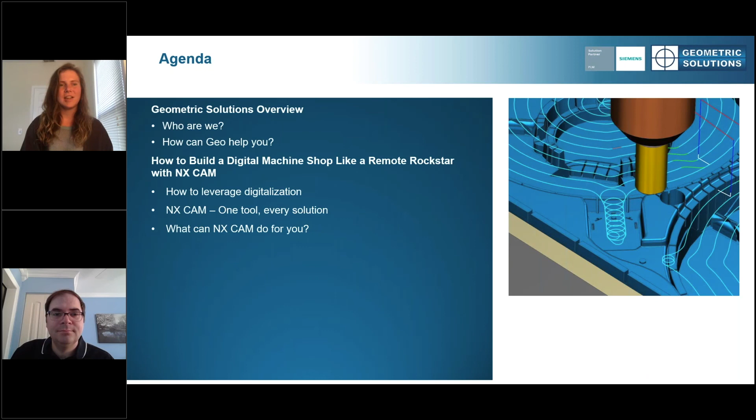Just a quick overview of our agenda. We're going to begin with a little bit about Geometric Solutions, who we are, and how we can help you. Then we'll jump into our main topic, digital machine shops, specifically leveraging digitalization, NX Cam specifics, and the potential of NX Cam as a solution.

Before we get started though, we're going to have a tale of 2 companies, Company A and Company C, or C minus. It's oftentimes that you'll have 2 companies, maybe even across the road from each other, in the same city, the same town, they have the same labor pool, they are even competing for the same business. But you could say that's where the similarities end.

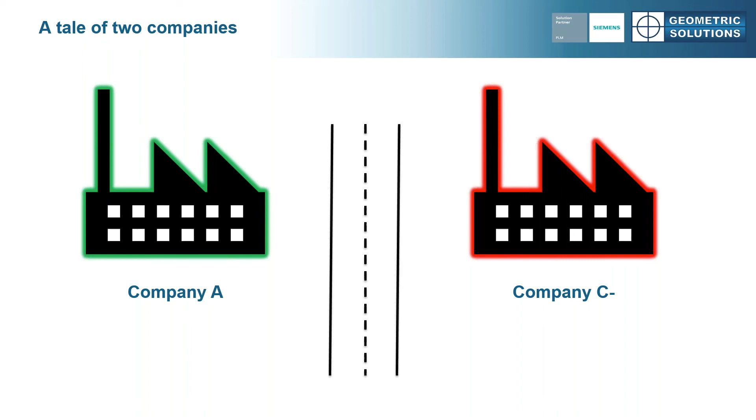With Company A, what do they do? They invest in technology. They invest in new equipment. They invest in their workforce, and they are thriving. Whenever I go and visit a company like Company A, everyone there is busy, but they're busy because there's so much work that's coming in.

We also sometimes will visit Company C, or C minus. When we go there, it's outdated technology, old equipment. They have a high attrition rate. Everyone working at Company C wishes they were working at Company A, and they are merely surviving. One of the companies we visited really falls into this category. They were off maintenance on all their software, so they couldn't get the support that they needed. Even for a machine shop, it was especially dirty. And it was interesting that when I went into the room to sit, even the chair that they gave me was missing an armrest. It just shows that company, they're just trying to survive.

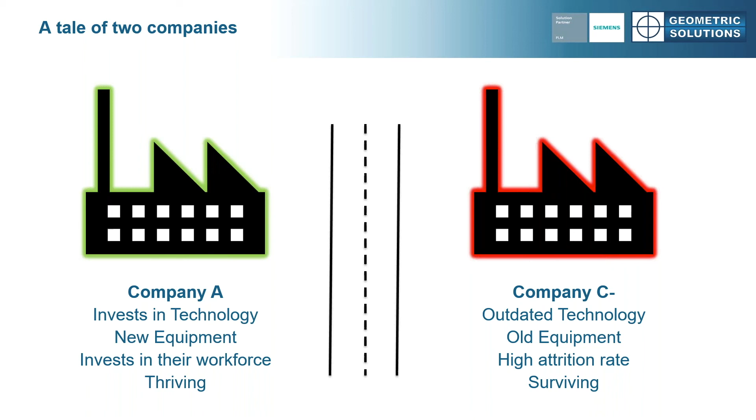When's the last time that you bought a book with paper? We probably used an ebook. Or when's the last time you bought a record or a CD? No, we don't do that anymore. We stream. We can see that digitalization in our day-to-day lives changes things. For me personally, I take Uber frequently, but I can't tell you the last time I was in a taxi.

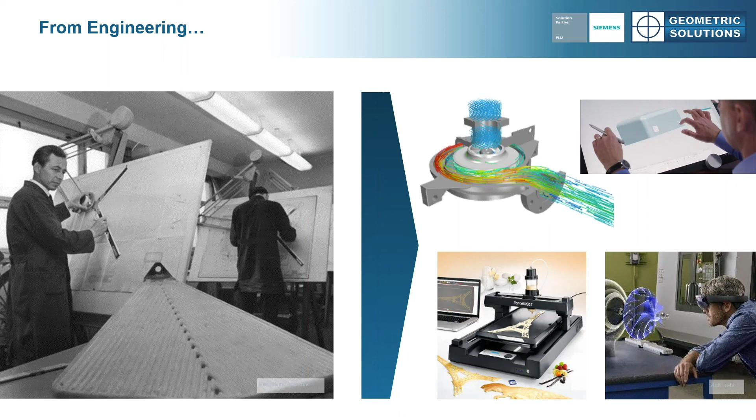Things are changing and they're disrupting markets. We're finding the same thing in engineering and manufacturing. With engineering, we're going from having paper and pencil and T-squares to being able to have virtual reality, 3D printing, able to really visualize what we're doing, or verification and testing.

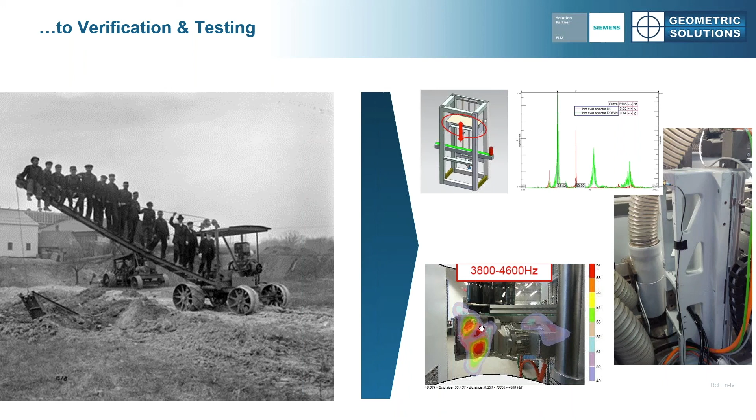It's kind of a cool picture on the left. We could say this crane, how strong is it? Well, it's 15 men strong. But that's how they used to do things. With digitalization, we're able to test things in advance without any risk of anyone being injured.

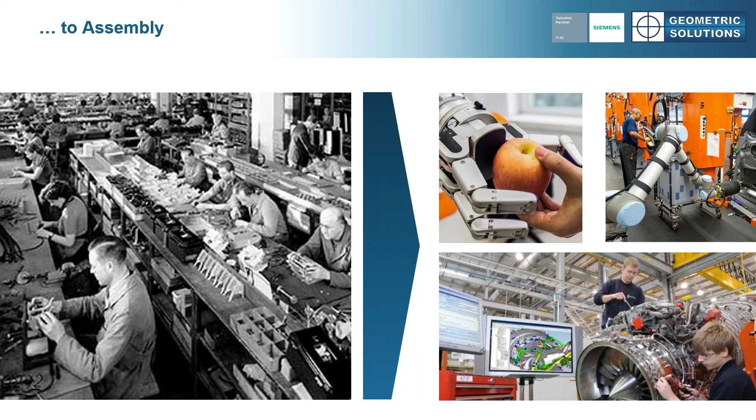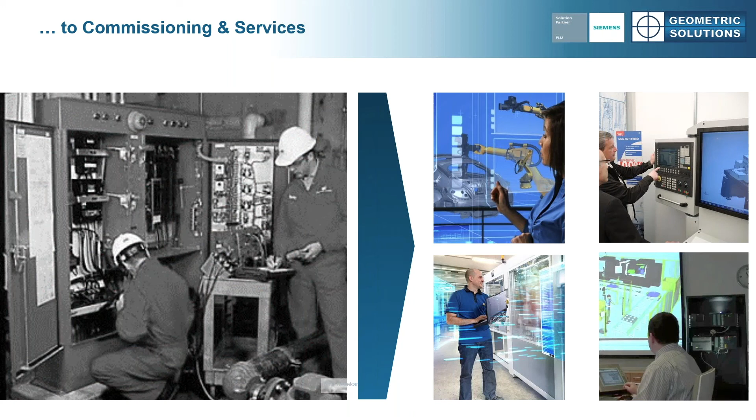With digitalization, though, what are we doing? We're using our workers more efficiently. We're using robots, cobots, and the like. Even when it comes to our commissioning, now it's much faster than it has been in times past. Why? Digitalization. And what we're talking about today, manufacturing production.

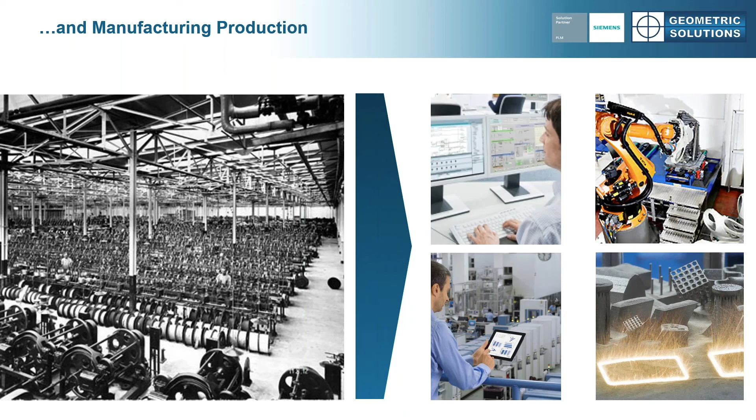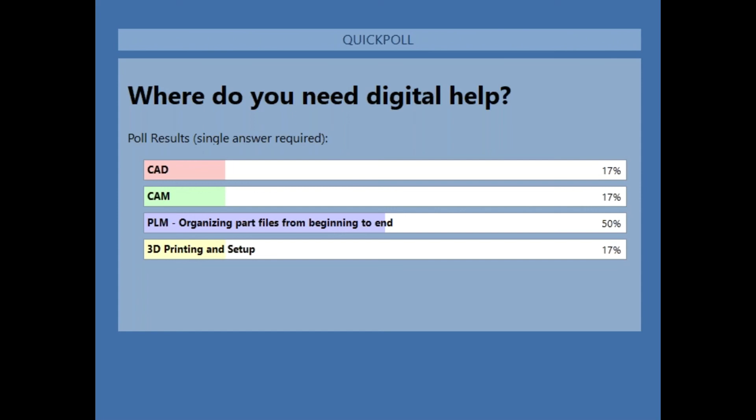Where do you need digital help? Looks like our top answer is PLM. That's interesting. Yeah, that is a big problem, that you can have a part, but which part is the most accurate? We're actually going to focus on that a little bit in this webinar.

When it comes to the issues our customers are facing, you can see them on the screen here. And not to be so cliche, but really that's what it is. We need to reduce the time to market. Consumers, their desires and demands, they change. You almost could say week by week or day by day. Traditionally, the big competitor has beaten the small one, but now it's the fast one that's beating the slow one. Or enhancing our flexibility.

Consumers now, they want to have products that are individualized to themselves. So I want to get a pair of sneakers that I designed, but I don't want to pay much more than the mass-produced ones. See, this is requiring more flexibility.

Now, we could be fast and flexible, but if we have no quality, that's no good. That's another thing that's changed. Today, if we make products that have poor quality, we'll be punished by consumers on the internet. On the flip side, if we make products of great quality, we'll be praised. And lastly, efficiency. It's interesting that in the modern world we're living in, it's not just enough to make our parts efficiently. We also need to make them environmentally friendly, or even think, how are we consuming energy? See, this becomes an advantage for us today.

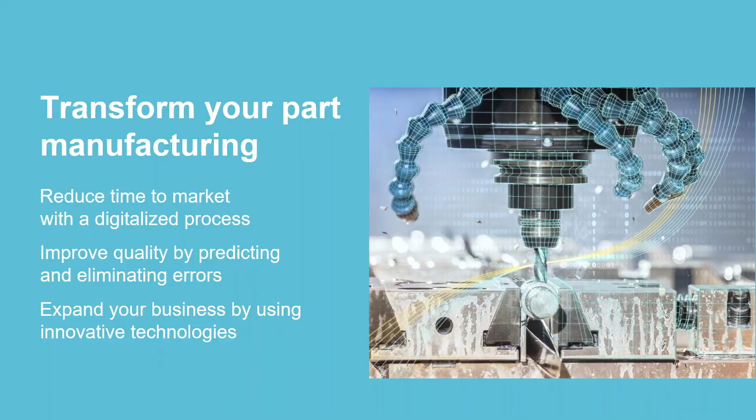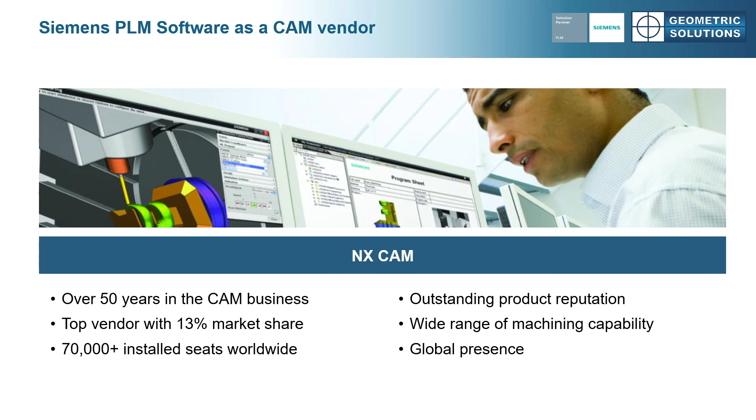NX CAM is a Siemens product, and it is very well established in the industry. You can see some of the numbers that are on here. I think one of the coolest things about NX CAM is that some of the largest companies in the world prefer NX CAM. But then some of the smallest companies that only have 1 or 2 machines, they too prefer NX CAM. And we're going to see more about that in a few moments.

There was even a survey done by CIMdata, and they brought out that NX CAM provides one of the strongest product offerings in the industry. So let's dive into that just a little bit more.

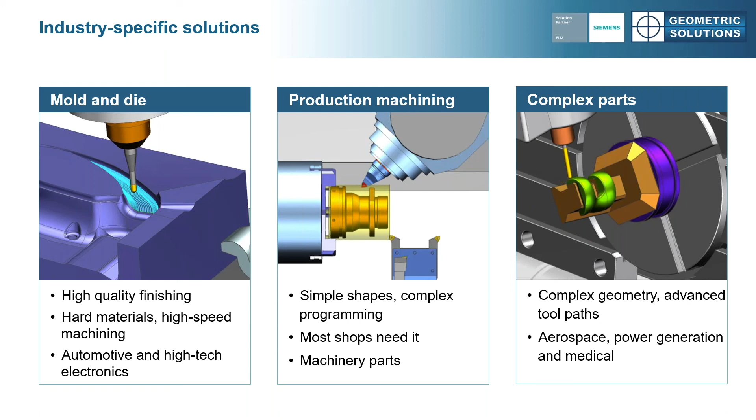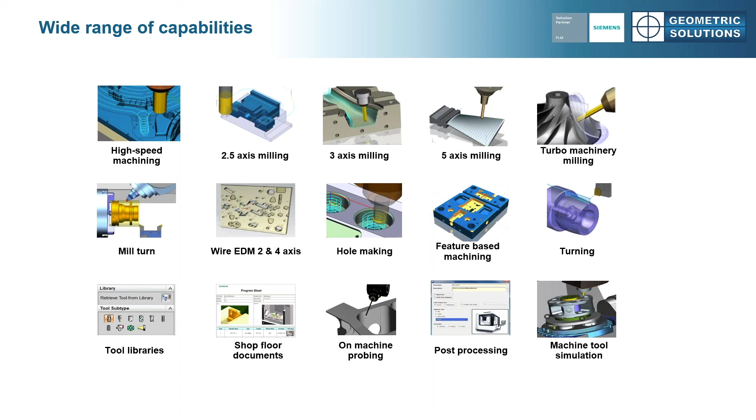NX CAM provides a wide range of functionality, from the simple, from just 2.5-axis milling and high-speed machining, all the way up to 5-axis milling or turbo machinery. The cool thing about NX CAM is that it's one program, one tool that can handle all of this. A lot of our competitors' software will be one specific tool for one specific operation. Not so with NX CAM.

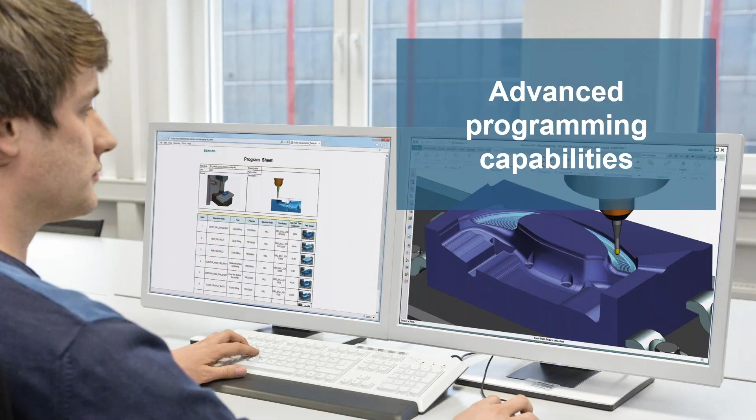To stay competitive, you need a wide range of advanced programming capabilities so that you can efficiently program any application. So with that poll and those questions, we want to be able to do it all. With NX, you don't need a bunch of specialized software systems that just focus on one application. See, that's where the flexibility comes in. NX CAM, you can have the most demanding job and it can be completed easily. You can also drive the latest machine tools to produce parts with high quality.

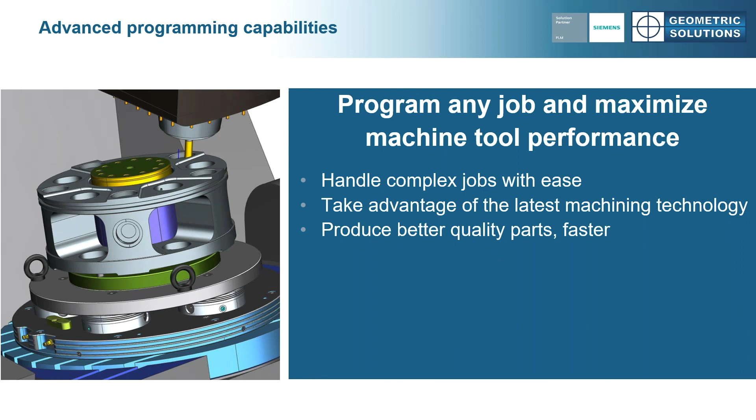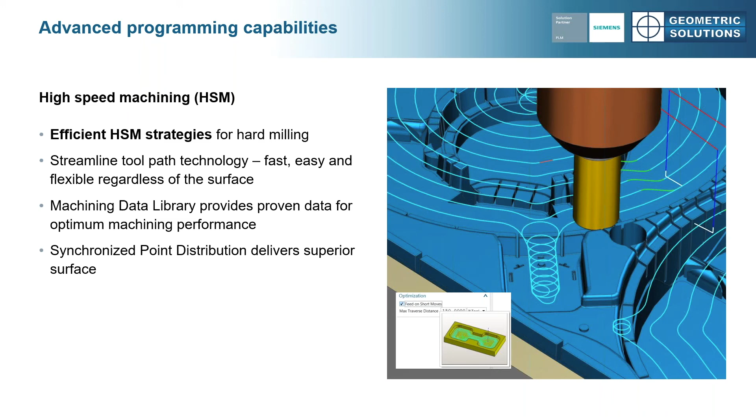So let's dive into that a little bit. Let's look at some of the NC programming capabilities. Now, the first, high-speed machining. This is an important capability in mold and die, prismatic and complex part machining. The high-speed roughing in NX maintains high metal removal rates while managing tool loads. So if you have ever done any machining, this is the part where you could say it is hogging out the material, but it's doing it efficiently, which is really nice.

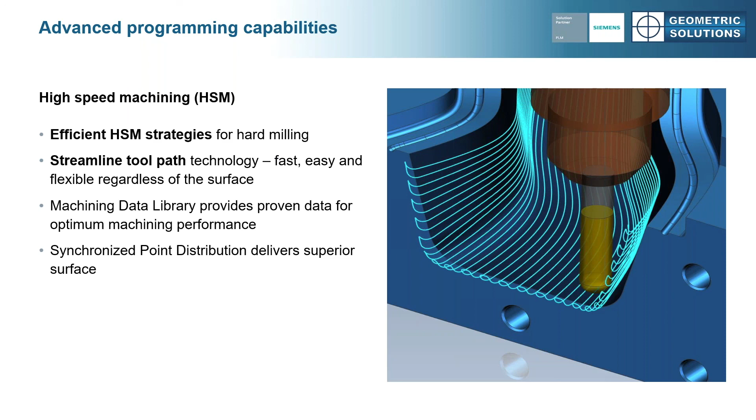The streamline toolpath allows you to create smooth flowing toolpaths that can be set to follow the critical contours or features of a part using just simple guide curves. What's nice about this tool is if you ever get a model and the surface is imperfect, it's got a gouge or a missing part in it, that's no problem, because with the streamline toolpath, you can put a curve right over that. And this will result in a nice, clean, beautiful finish.

NX CAM provides a customizable machining database that enables you to manage and apply proven data to associated toolpath operations. So what we're seeing here with this library, you can automatically apply the feed and the speed for your tool or for the operation. A lot of times machinists will get out the old Machinery's Handbook, or maybe they've got a chart on their wall to make sure they get it right. They don't want to end up on the fail section of YouTube with their CNC operations.

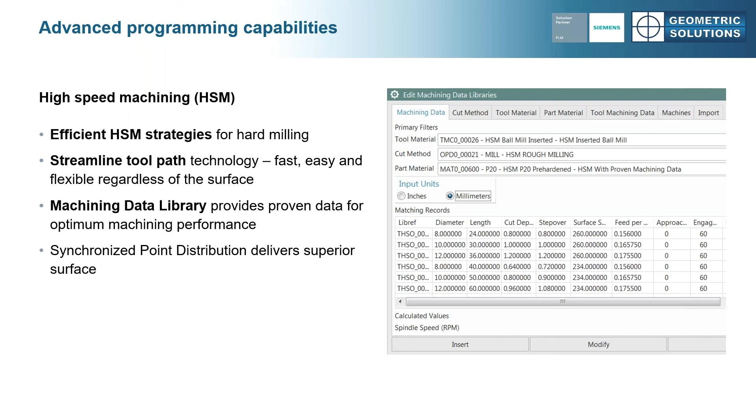NX also achieves a superior finish by ensuring that data points on adjacent passes of the tool are properly aligned with synchronized point distribution. You can see here in the markings overlaid on the example part that it's an exaggerated representation of the data point spacing and the difference it can make to the finish. So you can see on one side, the finish is really nice and shiny, looks good. The other side, not so much.

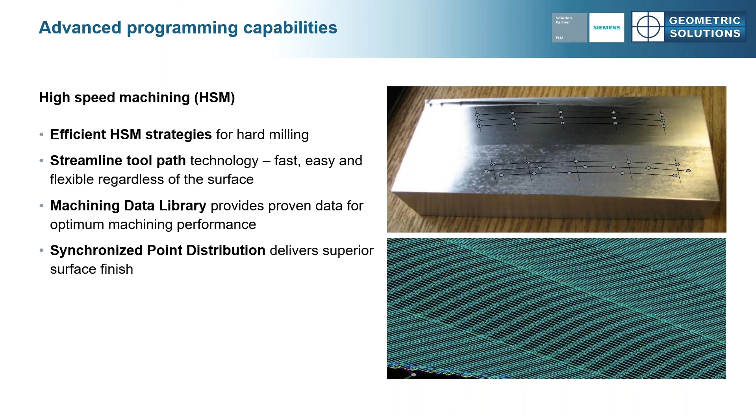Another advanced programming capability is the cut region management. For mold and die machining, this can be used for automotive, high-tech electronics. We have this interactive cut region management tool, and this provides a whole new level of control in planning machining strategies, because here you can preview, change, reorder, accept regions and associated operations before you even generate any toolpaths. The region boundaries can be adjusted, or alternate cut patterns could be selected for any region. And then tool axes can be interactively modified on a per region basis.

If there's a collision that's detected by the system, that's going to save you a lot. This preview and user control means the final machining results are both predictable and optimized. Now, this capability is especially useful for more complex parts where careful planning of the process is required and the user wants to be able to define exactly how a part will be machined. This can make the toolpath generation easier and faster.

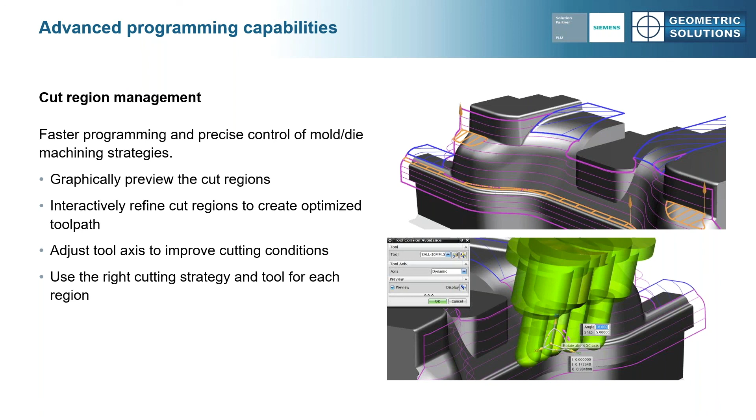The next is volume-based 2.5D milling. This provides a really fast and intuitive method for programming prismatic parts. It's easy—all we have to do is select faces, like the walls and the floors, and that's going to define the machined volumes. In just an instant, you'll be able to visually see what's going to be cut. This makes it 5 to 10 times faster.

Also, with this 2.5D volume-based milling, it's going to reduce the amount of air cutting. That means where the end mill is cutting one spot and then cutting nothing as it moves to another spot. That's going to reduce the machining time by about 10%, because you always want your tools to be cutting.

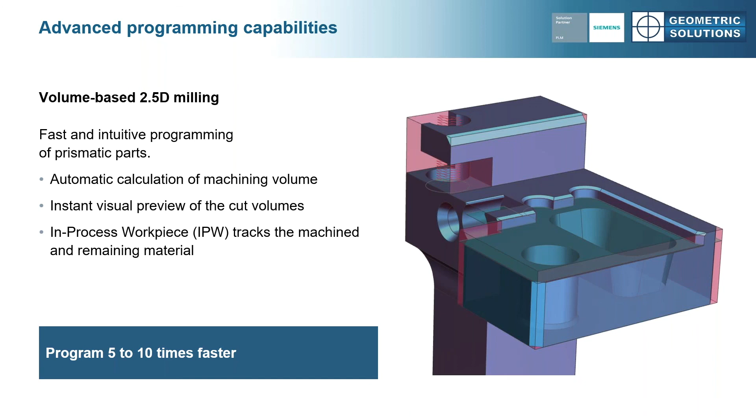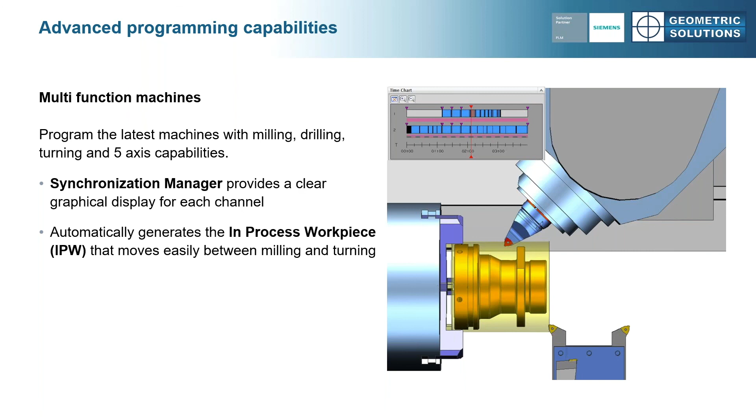NX also offers a range of machining capabilities for the latest multifunction machines, and it also supports simultaneous multi-axis operation. You can kind of see in the image on the top left, we have this synchronization manager. This allows you to interact with the machine, to have control across multiple channels.

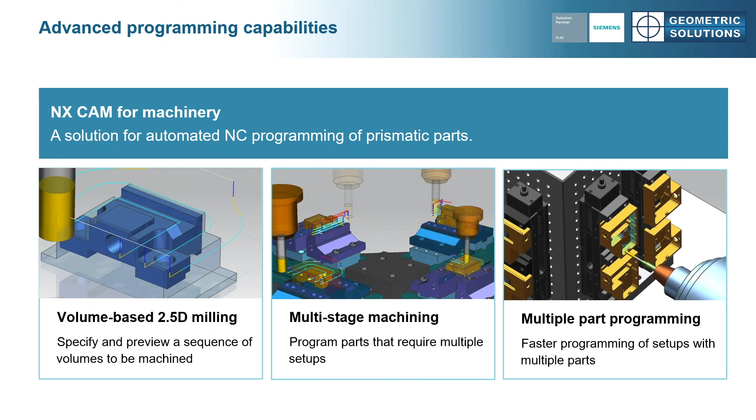Next up is just using NX CAM for machinery. We talked about the volume-based, but you can also see if there's multi-stage machining—so you've got a part that has multiple setups, NX CAM works great for that. Or, on the image furthest to the right, maybe you've got a bunch of different parts that need to be machined. Well, NX is also a champ with that.

As you can imagine, this is going to improve the time it takes to machine, but also the choice of machine that we're going to use. We won't have to wait until there's a collision to realize it's not the right tool.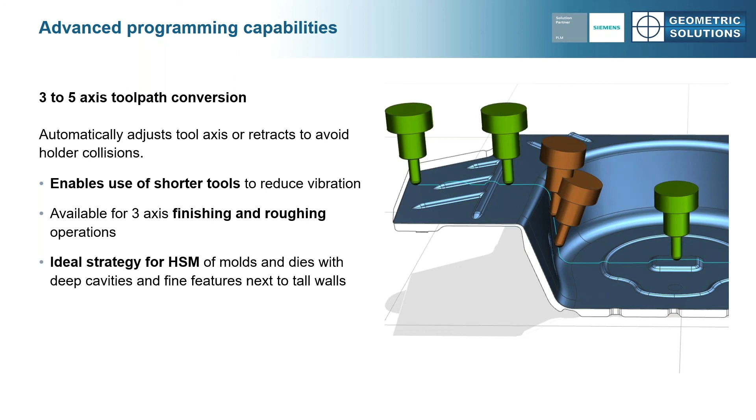NX-CAM has been established in 5-axis capabilities longer than most other systems. For really complex parts—think aerospace, power generation, medical devices—NX has a bunch of highly flexible options.

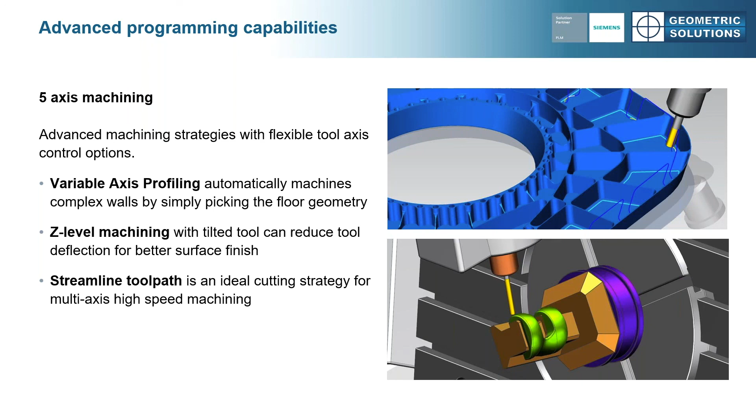One of those options is that if you have a part that has a bunch of different pockets and a bunch of drafted walls—think about the blue part on the top—there's all those pockets, drafted walls. With NX-CAM, all we have to do is select the floor once, and then the system will create the finishing toolpaths for those walls. Pretty cool.

When it comes to turbo machinery, we can think about this as impellers, blisks, really crazy looking multi-bladed rotational parts. Well, NX is a champ at programming these parts. In fact, it's been found that we can save about 50% of our time in programming because we have a turbo machinery milling option.

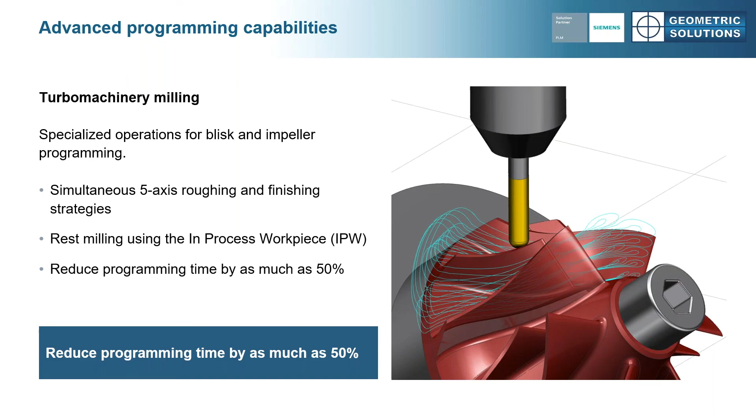Really, you need to improve your productivity and create new opportunities to transform your manufacturing operation with the latest technology. So we might think of this in terms of 3D printing or using robotics. With NX, you don't need to have multiple specialized software systems focusing on a bunch of different applications. Now you might notice I've said that a couple of times, and that's because that's a powerful statement. The flexibility of NX-CAM means that the most demanding jobs can become easy. You can efficiently drive the latest machine tools to produce parts with high quality.

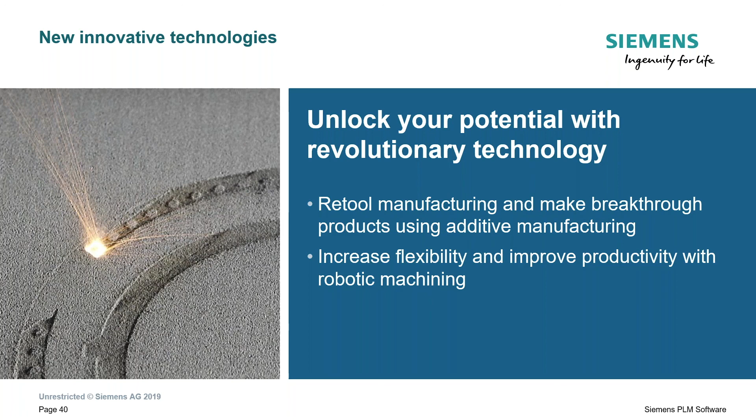So let's explore some of the advanced NC programming capabilities. And we're very excited about what we can do with 3D printing capabilities in NX.

Whoops, I think there's supposed to be some animation playing. Just a sec. Let me go back one.

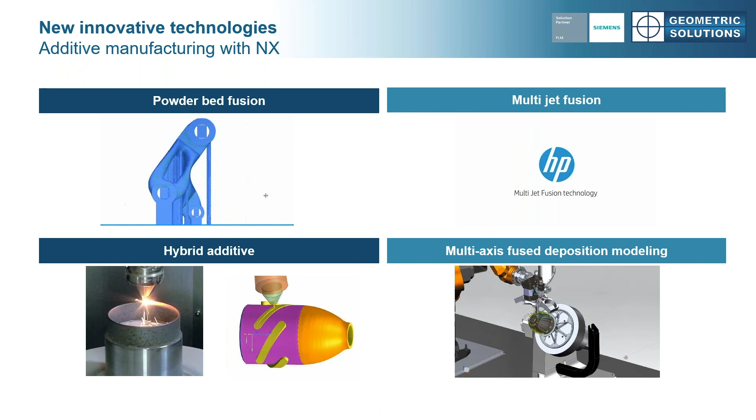Then we have hybrid additive machines, or in the other image, multi-axis fused deposition modeling. What's nice about both of these tools is we're able to create things that before may have seemed impossible. And how are we doing this? Well, we're using NX.

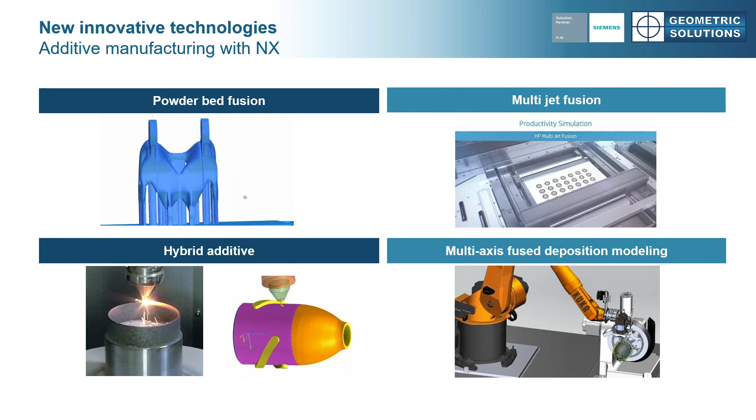Now, outside of 3D printing, there are some other innovations. We might think about robotics. Some of us think of robotics as just lifting, positioning, or welding, and that's it. But robots can do so much more. You can actually take a robot and fit it with a tool holding head, and then perform machining operations.

You can improve your productivity by taking advantage of these continuous technology advances. Robotic machining lets you increase your flexibility to machine larger parts, and the nice thing is in one setup you can improve repeatability and accuracy by relying on the precision of the robotic motions.

Next up, we're going to look at programming automation. So we've talked about how NX can be used on so many different things. Well, let's see with programming how it works.

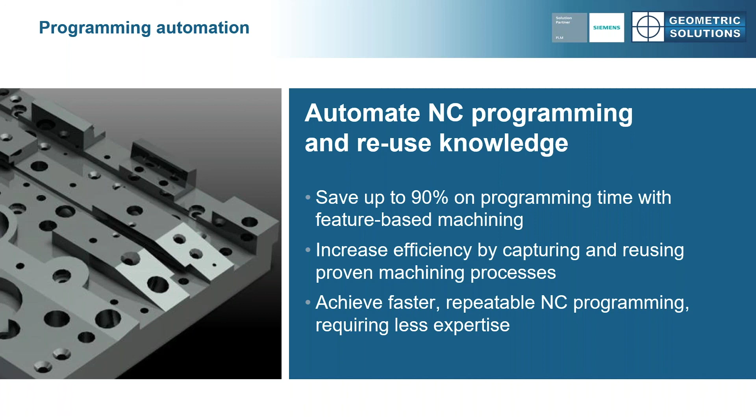With advanced feature-based machining, it provides extra value in programming automation. In addition, capturing and reusing your knowledge is a powerful way to increase efficiency. We're going to look at that. The key takeaway is that we can save up to 90% of programming time by using this feature-based machining. Let's look at that more in depth.

Feature-based machining is a great example of programming automation that can lead to greatly reduced programming times. NX CAM can recognize a wide range of machining features on a 3D model. This technology automatically selects and builds the machining operations for those recognized machining features. This allows for toolpath and tool change optimization prior to final output. Essentially, you're letting the computer recognize those features and give it its best shot.

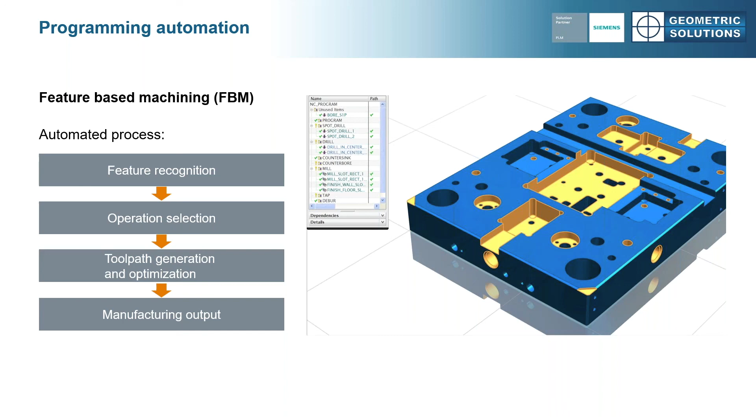Now, there's another thing called the teach feature and teach operations. It could be that your company knows your machines and your processes, so you can teach NX CAM to follow your processes. Doing this will allow for fast and error-free programming.

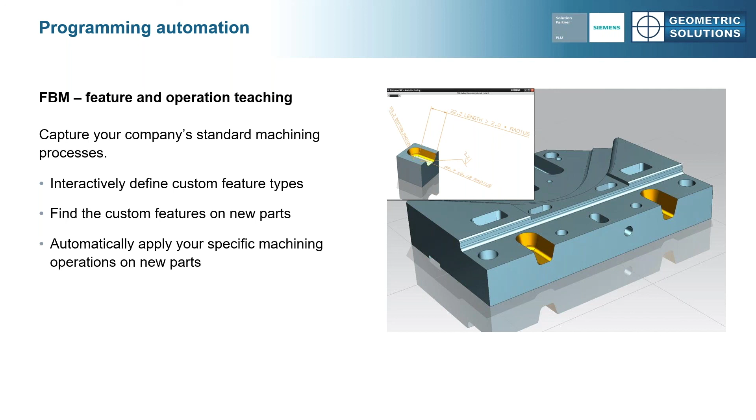Even something as simple as drilling holes is streamlined within NX. You can actually see and visualize each step of the operation, and we can program holes without even selecting any geometry. If we use this hole making capability, the programming of the holes can be reduced by up to 60%.

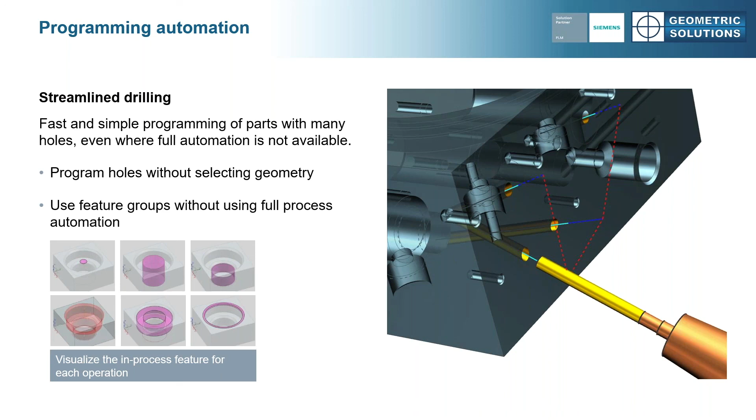The next thing we'll talk about is product and manufacturing information, or PMI. PMI is being used throughout the industry, and its usage is increasing drastically. A lot of the big OEMs use it, as well as aerospace. What PMI does is put the surface finish, positional tolerances, and GD&T right onto the part.

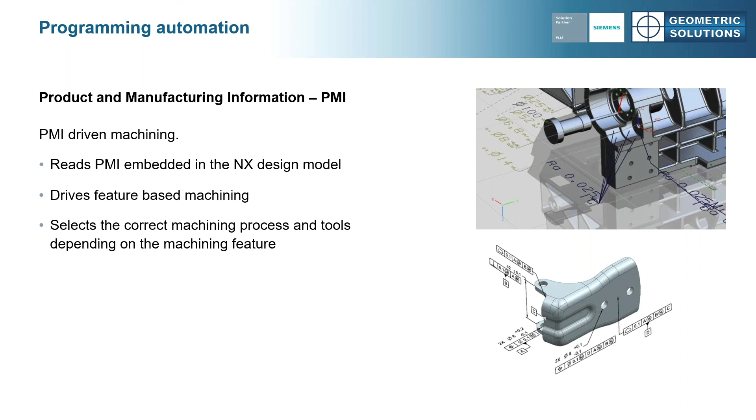And with our feature-based machining, it recognizes that. What's the point? Well, it could be that we might select a different machining method, perhaps one without extra operations, because we can read what that tolerance and surface finish is - or rather, the software can do it.

What about CAM wizards? These are really neat because, as we said, you know your company and your products. It might be that day after day you're making widgets of various sizes. Well, why not let the computer, through this little wizard, do most of the programming for you?

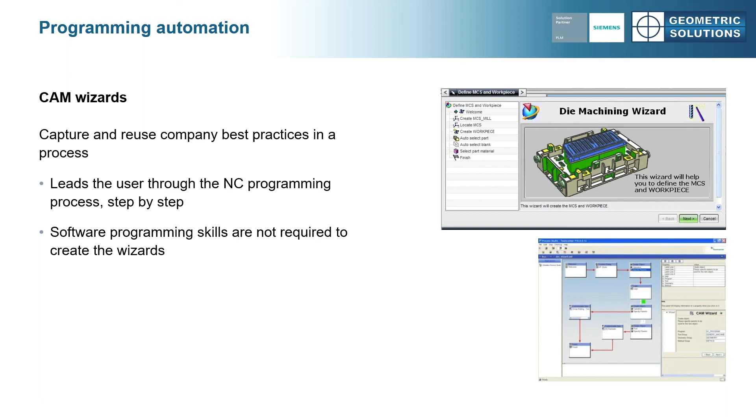When it comes to feature-based capabilities, Armo Tool found that about 90% of the model is something the software is able to recognize. And as we said, it recognizes it, and then gives it its best shot as to which operation to do.

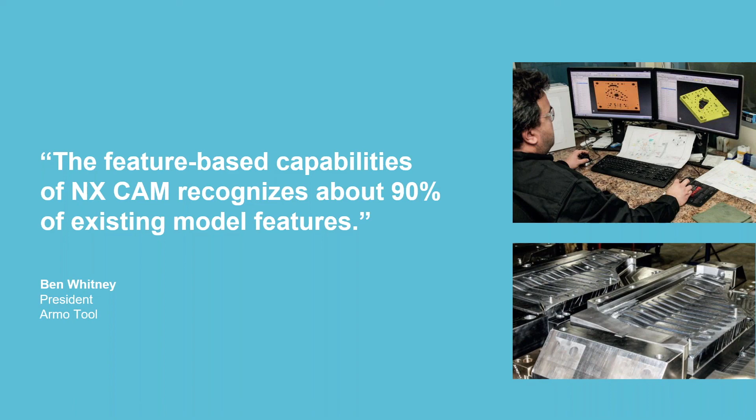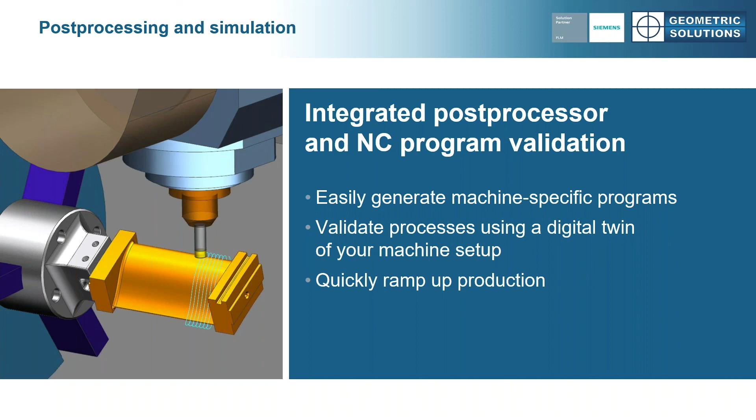Next up is post-processing and simulation. NX CAM provides integrated post-processor and simulation, which can minimize the setup time and ensure error-free production on the shop floor.

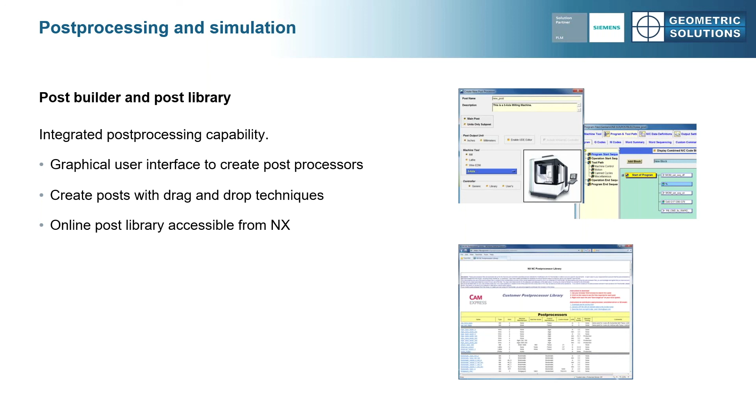The NX Post Builder is provided as a standard part of NX CAM. We're able to take any of these posts and edit them with a post builder. Siemens maintains a whole library of posts that customers can access, so whatever machine you have, most likely there's a post that will work for it.

The simplest level of simulation that all CAM systems offer is toolpath simulation, usually with material removal from the stock. So that's like where you would see the end mill running all around the part. The vast majority of systems will show that.

But where NXCAM is different is that we're able to run that simulation actually using the G code. It's called G code driven machine tool simulation. It's going to be a closer representation of what the real machine is going to do in real life, because the simulation is driven from posted code. You might think, well, what's the big deal? Well, that's going to allow us to ensure less collisions, less mistakes. It's going to be more accurate, a better finished part.

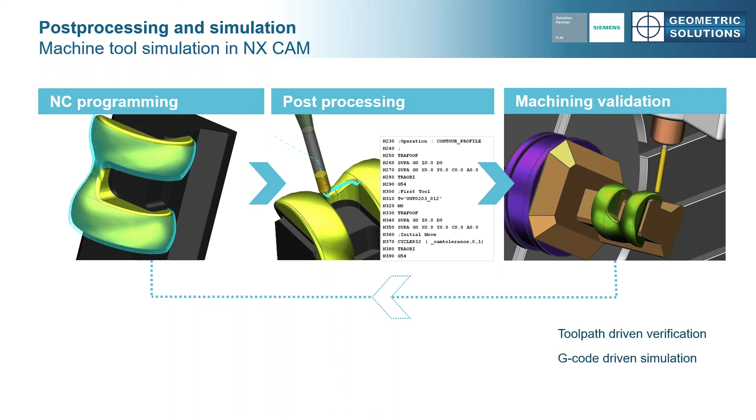NXCAM also has lots of solutions for advanced machine tools. We can provide any solution, including post-processing, and even taking your machine and creating a 3D model of it.

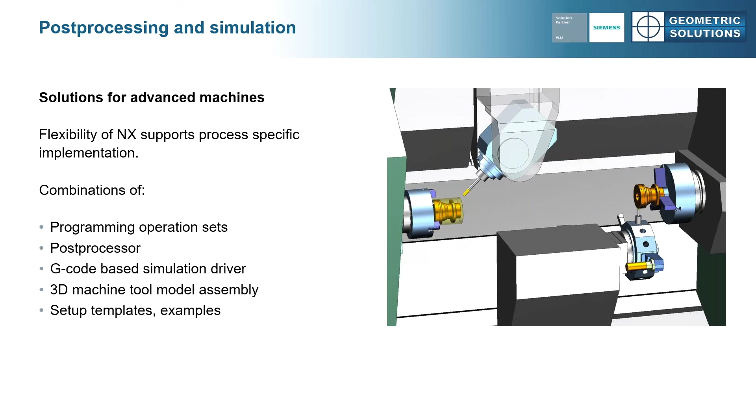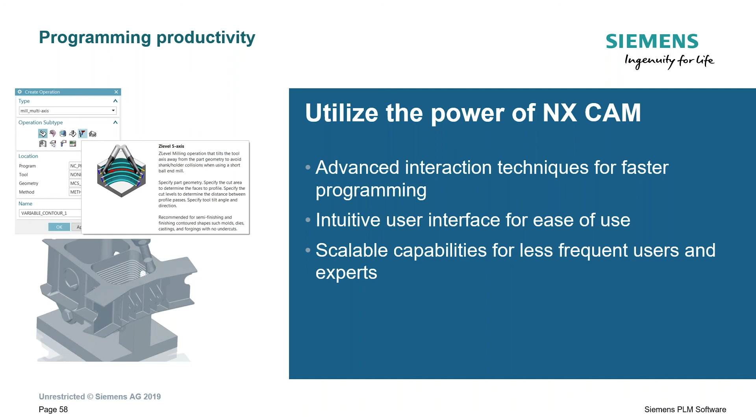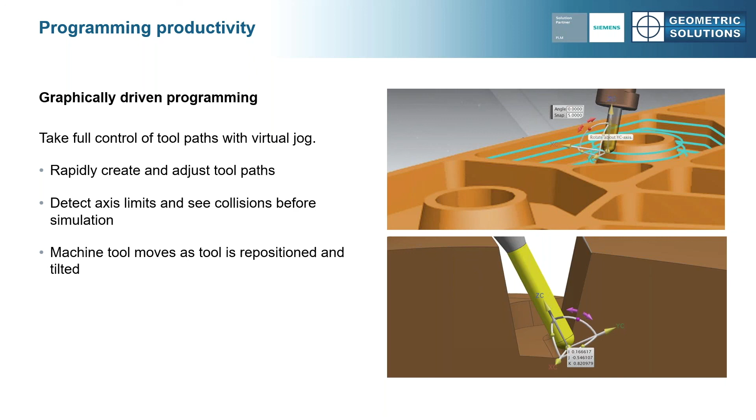We might think, well, NXCAM certainly is powerful, it can do a lot, but is it very difficult to use? Well, what they've done is include a number of roles within different versions of NXCAM. So there's an NXCAM role for a new user, an NXCAM role for an experienced user, and so on. We also have a bunch of self-learning tutorials and application-specific workflows. The idea is that you start using NXCAM and you can hit the ground running.

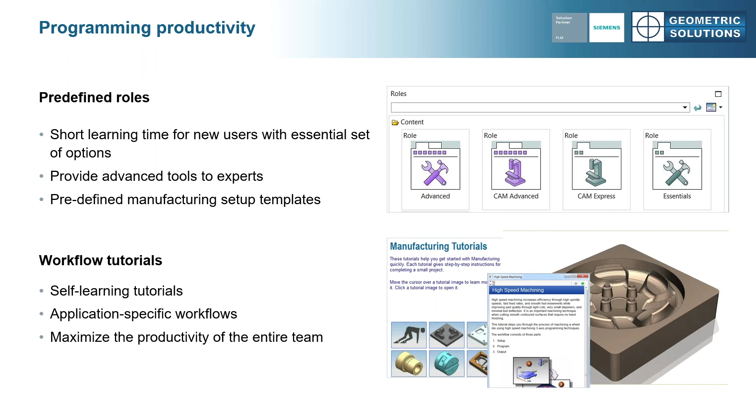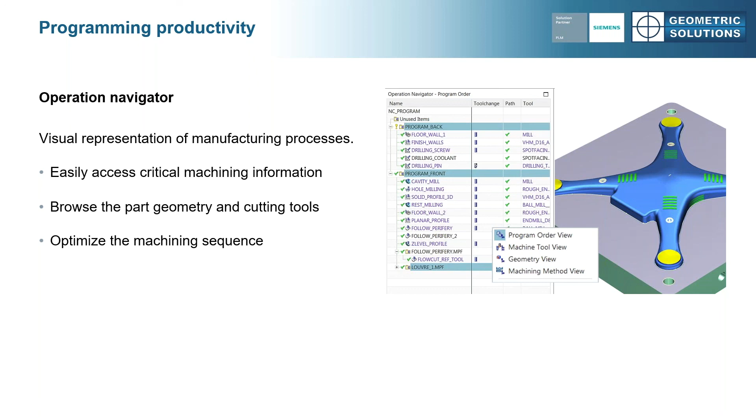When it comes to operation, the Operation Navigator keeps all of this critical information accessible, and that facilitates reuse. You can take one thing you've done, copy it, paste it, and use it again. This program order view gives us a lot of information and helps us know what's going on with our machining.

We also have an intuitive user interface. Across the entire interface, we use the latest methods of making user interaction fast and easy. A simple example is the use of dynamic images in the menu dialogues to provide visual feedback for the dialogue options.

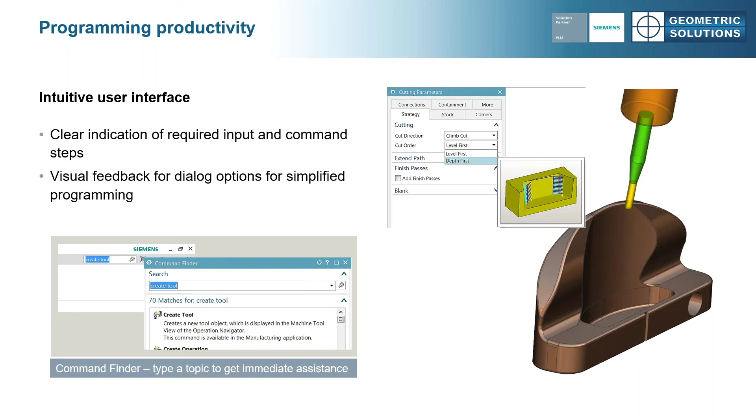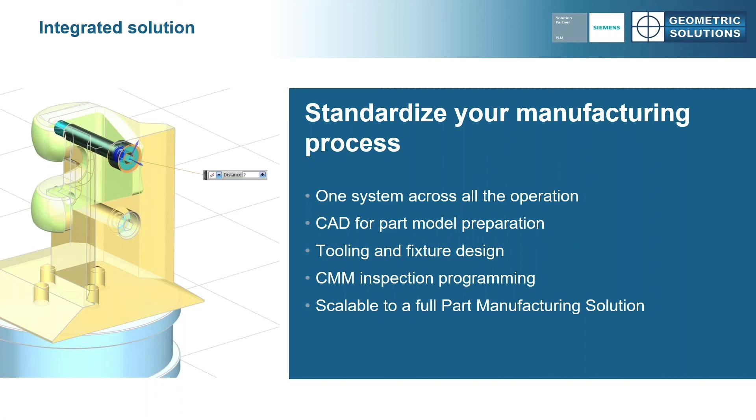NXCAM has a wide array of functionality. As we said, from simple, easy NC programming all the way to multi-axis machining or turbo machinery, NX is able to do it all.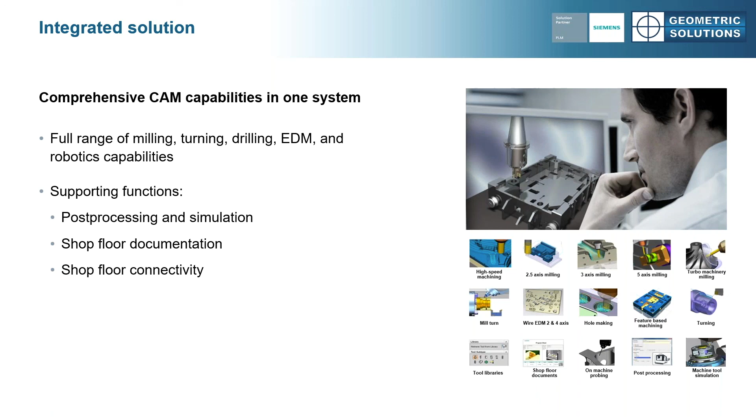The latest CAD technology in NX enables the programmer to rapidly prepare part models, including any third-party CAD models. So if you get a CAD model that's not NX, you can still make adjustments to it. It also provides additional manufacturing applications for tool and fixture design.

The 3D model moves seamlessly between applications without any data translation. So if you're using NX CAM and need to make an adjustment to the part, you can go right ahead and you don't have to worry about losing any of the data.

Now, a lot of companies today have a multitude of programs. They'll have one program for the CAD or for making adjustments, and another program for the CAM. The problem with this is we start to lose out on that data translation. It could be that the data becomes corrupted, or more frequently, we just don't know which data is the most accurate.

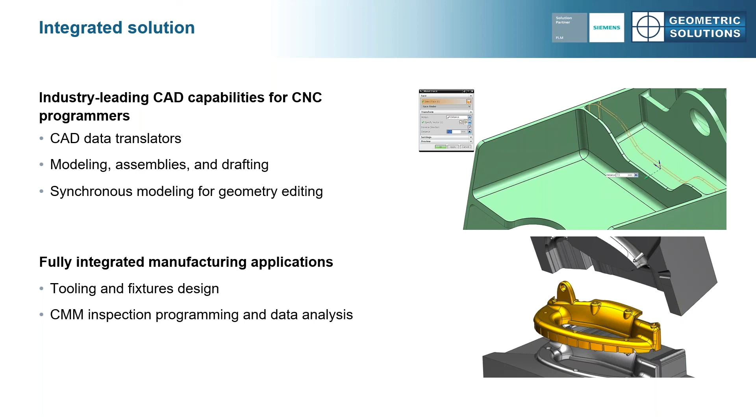Siemens, though, provides a complete manufacturing solution, all the way from planning to production. This diagram represents a view of our complete manufacturing solution, and as we've talked about a number of times, there's an integration. With NX, we have a suite of CAD, CAM, CAE, CMM, all the acronyms you could ever want, but they're all baked into one system, right into NX.

Now, on the poll question, what was talked about was the data, or PLM. Well, NX works really well along with Teamcenter. Teamcenter provides data and process management that allows manufacturing and engineering teams to work together with just a single source of information. The nice thing with this tool is that you don't need to have multiple databases, or name your parts with the date just to hope you don't get the wrong one. No, Teamcenter takes care of all of that.

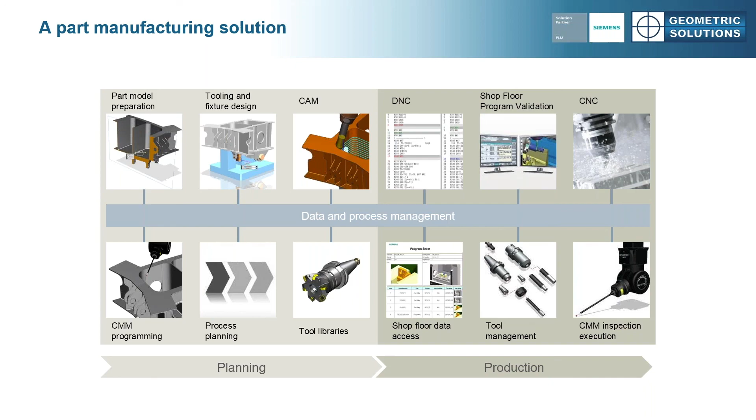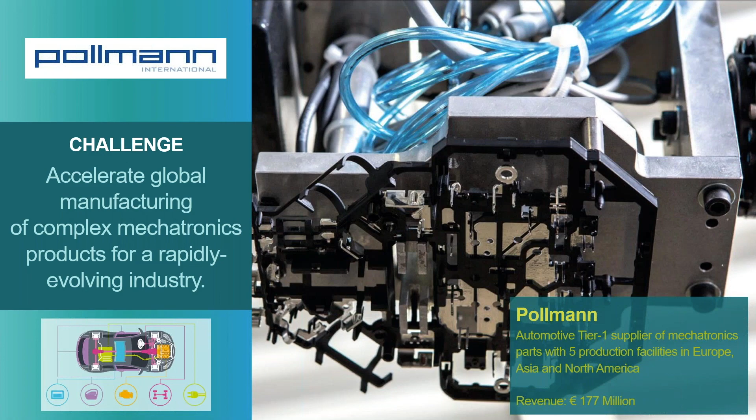Let's take a look at some testimonials from customers that have used NX CAM, and let's see how they've done. The first company is Pollmann International. Now, the challenge that they had was they're creating a bunch of complex mechatronics products, and they need to do this globally. So what was the solution?

They used NX CAD and CAM, and then they used another Siemens tool called Tecnomatix and Teamcenter. By doing this, notice the tooling design period was shortened 35%. Their process stability was improved, and they're able to collaborate with the different departments, but also with their customers instantly.

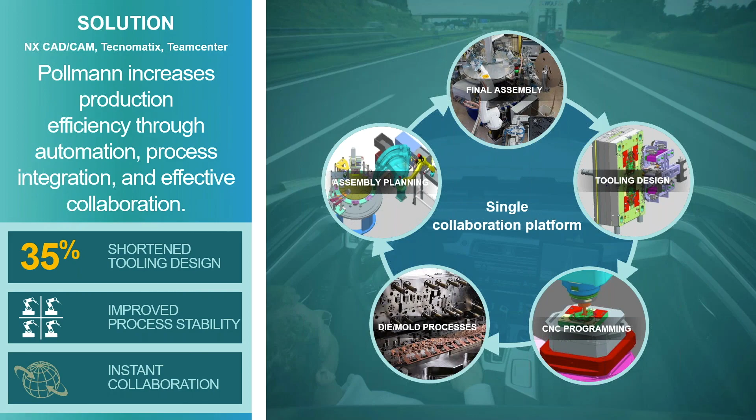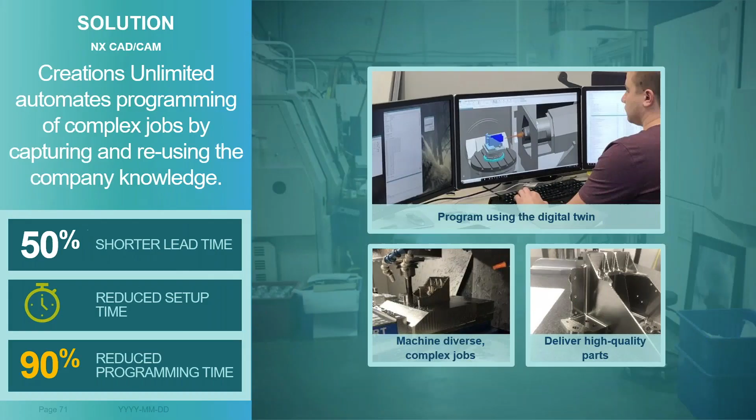Another example is Creations Unlimited. This is a smaller machine shop. They're in automotive, transportation, semiconductors and medical. Basically, you could say they do it all. This is the good example of Company A. They wanted to beat their competition, so how could they keep an edge? What did they do? They used NX CAD CAM. So they were able to program complex jobs by reusing their company knowledge.

Their lead time was 50% shorter. Setup time shorter. Programming time, can you believe it, 90%. Imagine if they are competing with your company. See, they're using all these tools. They're embracing technology, which is really what we want to encourage.

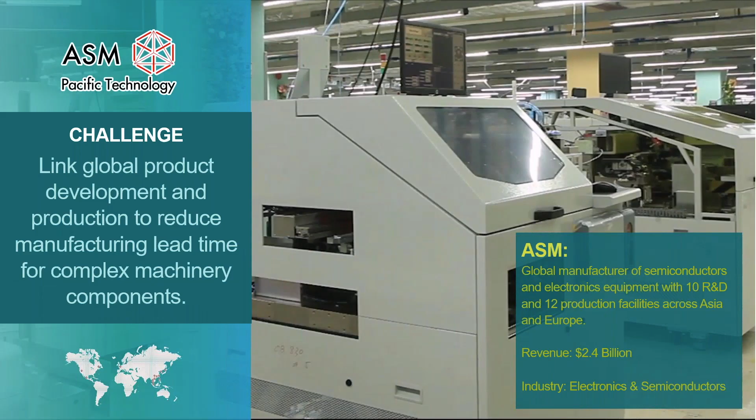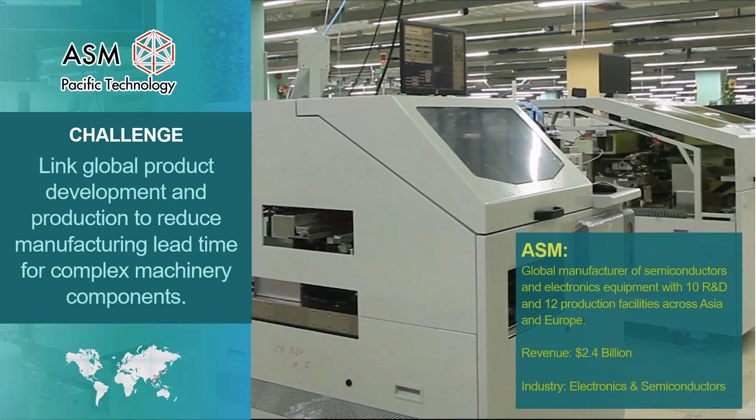Another is ASM Pacific Technology. So what do they have to do? They have a global product development team, and so they need to reduce the manufacturing lead time for their complex parts. What did they do? They went with NX CAM, and they were using PMI, or product and manufacturing information, along with feature-based machining. And then they were able to get that design intent right from the computer screen to the actual part.

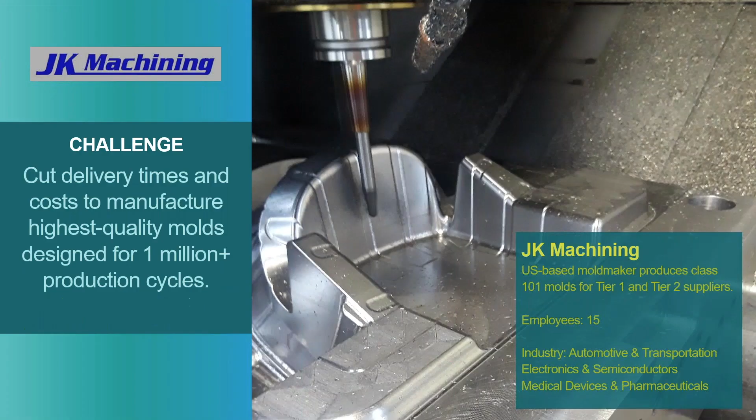Next up, JK Machining. Again, this is one of those smaller companies. You'll notice they've only got 15 employees. And what they're creating is they're making parts. Sometimes it's just one-off, other times it's molds for over 1 million pieces. What did they use? NX, CAD, and CAM. Their development time for making molds was 45% shorter. NC programming, 70%. And then they were 4 times shorter with their machining time. Very interesting, isn't it? It's a smaller company, 15 people, but look at the success that they're able to have.

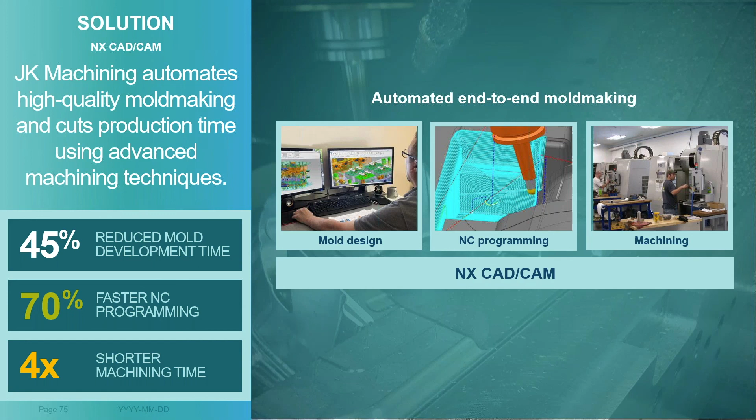What were they able to do with this? It was a reduction in programming of 40%. Machine setup was lessened, and machining time was lessened. You start to get the idea that with these tools, what are you saving? You're saving time, really a lot of time, and time, as we know, equates to money.

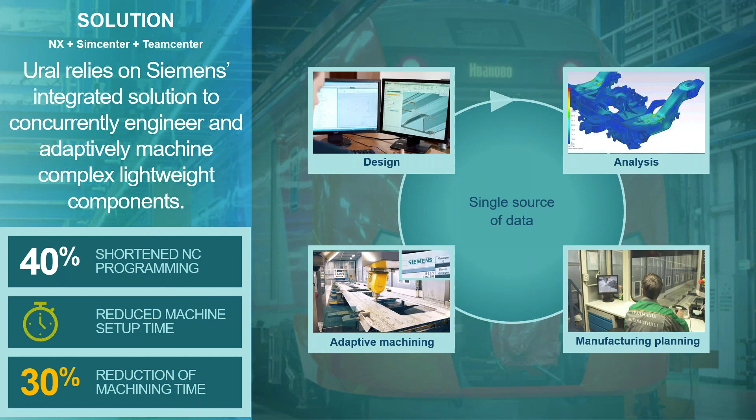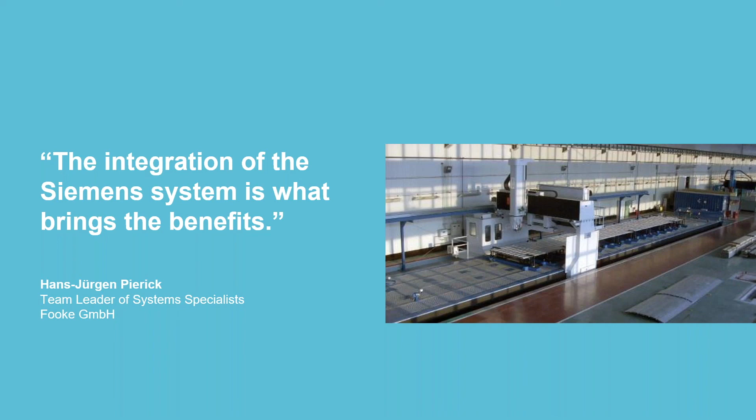As the team leader, Hans, says, the integration of the Siemens system is what brings the benefits. So it's that we can take not just CAM, but we can incorporate CAD, Teamcenter, 3D printing. And when it comes to CAM, it's not just the simple, the little things. No, it can do everything. So you could say NX CAM, it's one tool, but it has every solution.

Now, at the beginning of this presentation, we started with a tale of two companies. Hopefully what you've gotten to see this afternoon is that if you can embrace technology, if you can embrace digitalization, your company is going to be thriving. If you're unable to do this, well, then it only takes something small, or it only takes a pandemic, which is not small, and that can knock us right out of the game.

That's where getting into digitalization, using tools like Siemens NX CAM, is really going to save the day. Those couple of companies that I visited, Company A and Company C minus, it was just a really interesting comparison between the two. With Company C minus, it just takes a small thing and they're out. And it was interesting that most of Company C minus's work was the reject work from Company A. So what we want you to do: embrace digitalization. It changes everything and it can change your company for the better.